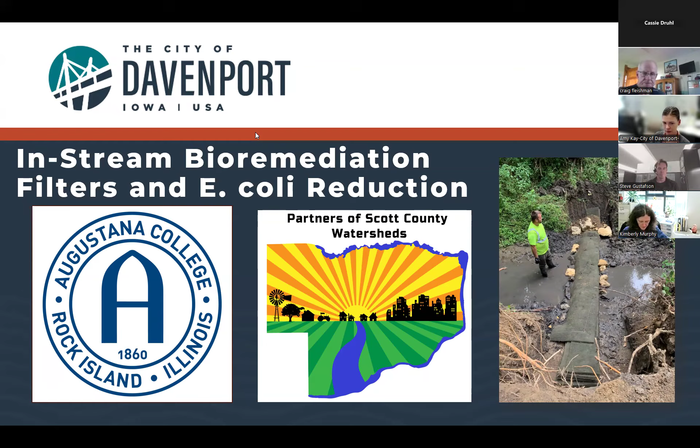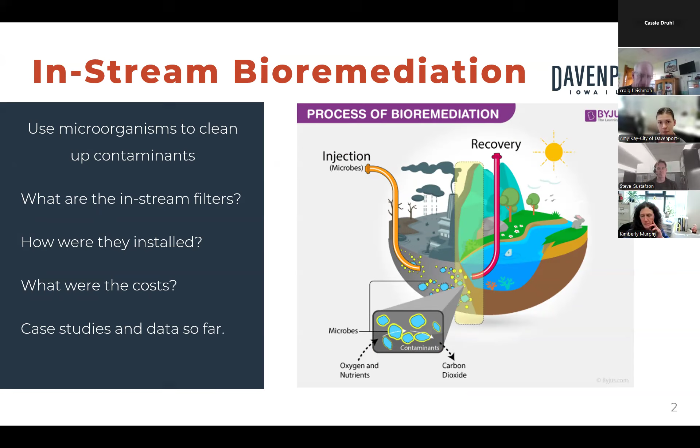So today we'll talk about what the filters are exactly, and how the install went. Just a little bit on the costs, and then case studies and data so far. And we've got a new project happening this summer that Kimberly will talk about in a little bit.

Steve, I didn't know if you wanted to provide a little background on Franklin County and how you came up or found this information.

Sure. So I was back, probably 6 or 7 years ago, really interested in looking into in situ, in-stream ways to deal with contaminants—E. coli or basically nitrate and phosphates. How I could use the stream to kind of treat itself.

So I came across this presentation on the internet by Franklin Soil and Water Conservation District, where they had taken this material that, in one of the next slides, you'll see they use floating water treatment islands made out of, and they cut it into strips and put it into streams.

They were basically looking at creating pools behind it to create habitat for small fish and invertebrates, and they noticed some decreases in E. coli. They were not a huge district and didn't have a lot of budget to monitor—they just kind of noticed it and put it in a presentation, which caught my eye.

That sparked this interest into, wow, what's going on here? I kind of hijacked the idea, I guess I would say. They came up with a lot of experimentation of how to put these things in.

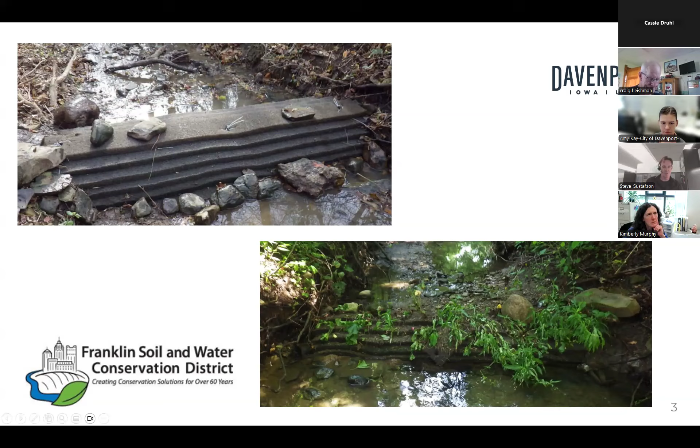You'll see this is one of their early installations. These next slides are from theirs—you can see some of their failures in that left-hand upper corner, experimenting on how to put these things in, and getting blown out during storms and such.

So we kind of learned from them. I was able to talk to the guys that did that before he retired. They probably did it in 3 or 4 spots over a few years just to see what worked, what didn't. So I was able to learn quite a bit on installation and logistics of what worked and what didn't before Amy and I even got a chance to put these in ourselves.

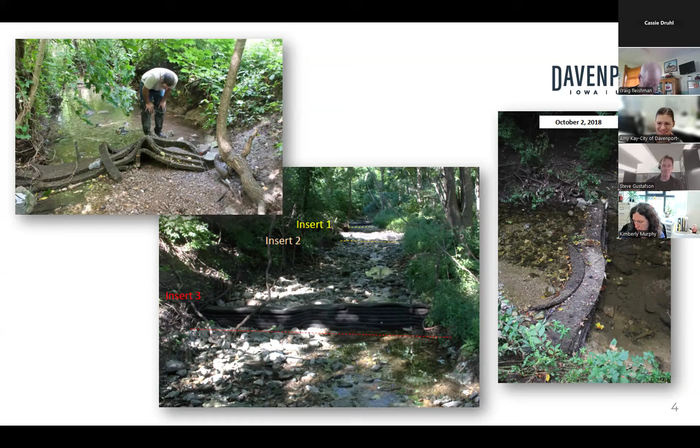Yeah, you did a lot of legwork there. I don't know what your next slide is.

On the right hand is the traditional use of this material. It essentially is a plastic mesh—I kind of equate it to steel wool, but it's plastic, and I think it's recycled plastic, like from 2-liter bottles and such. There are a bunch of different companies that sell these.

Biohaven, I think, is one of them, and we have these around different places in the Quad Cities. What they're usually treated for is you put plants in them, you put them out on a waterway, the roots go through, and they basically bring in nutrients.

But you can buy the material in strips—I can't remember how, what, 100-foot long strips? It comes in like 7.5 foot tall by 90 lineal foot, so it's a giant roll. I got an image later in the presentation, but yeah, to do with what you want, right?

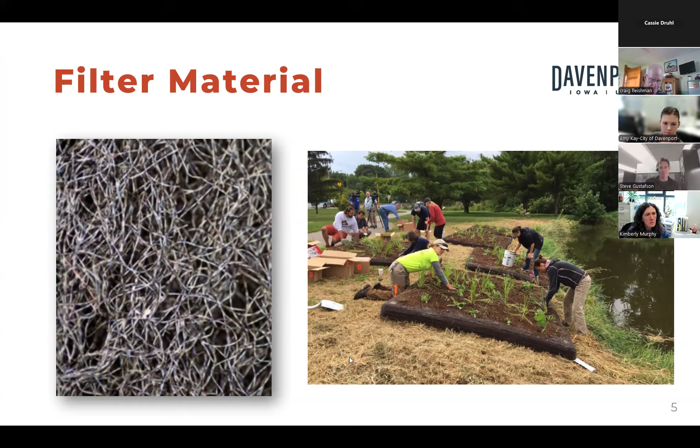It's this material, which you see on the left hand side, which is basically what we want water to float through. So we're changing what was basically a matrix for plants to propagate through and grow into, to basically change it into a place for bacteria to habitat, and water to flow through. That's what Franklin Soil and Water Conservation District kind of created. So that's basically what we're doing—we're changing the purpose of the material.

And then Amy, I guess if you want to talk about more logistics of how we actually built these, because that was a lot with your folks as well. Yeah, so the Franklin County was able to put together these images for what they learned in their install.

On the bottom left, on one of the pictures we saw, the material kind of lifted up from the flow. So they found if they were to put a blanket over top of their layers, that would hold everything in place and prevent it from lifting. In addition, they found that if you created a depression in the middle of the layers, it would keep flow from hitting the banks. Also, it was a requirement, and the second set of filters we put in from the Corps had different plan reviewers from the first project to the second, so they were just looking for some different types of things.

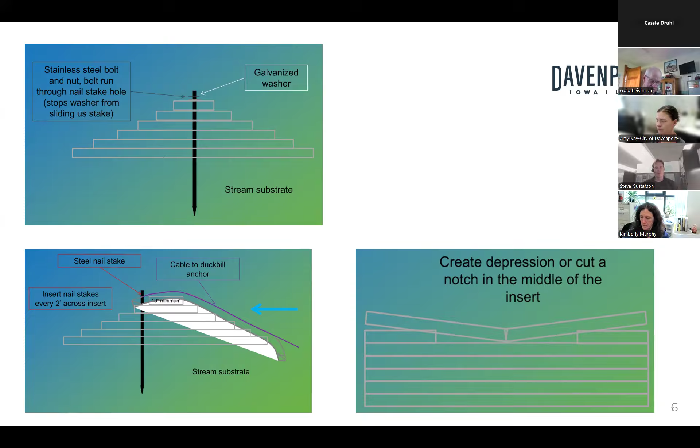But they did all of the legwork, so we had a pretty easy install. The anchoring is primarily through these duckbill anchors, where you slide them in, and when you pull it taut, they spread out like a wall anchor.

And that helped keep the stakes in place. And these are just concrete stakes that you can get from anywhere that anybody deals with concrete or setting up forms, and these will go into the ground. And then we used wires to connect everything. We've got another picture on that too.

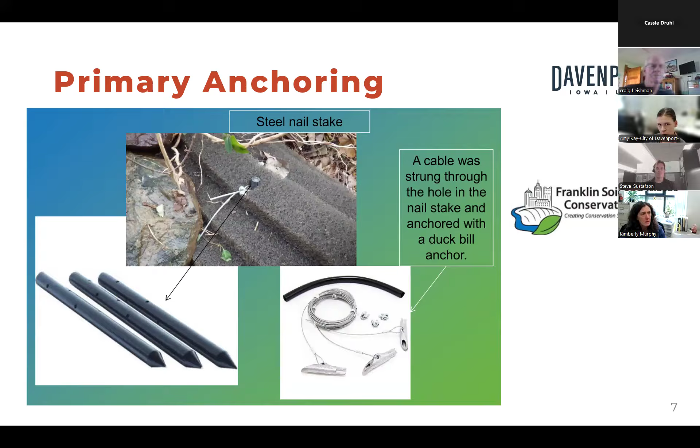At the first install, we actually had to get 4-foot anchors. We started with 2-foot, but the sub base and surrounding soils were so saturated that we couldn't really get any tooth on it, and they pulled out. So depending on what your environment is, the 2-foot stakes could be appropriate, but if it's really squishy, you may have to go to 4-foot long.

And here's an image of one of the rolls, but we still have one with our supplies. So they're 7.5 feet tall by 90 lineal feet. We got it from a place in St. Paul called Brotex, and I think they also sell like the pre-made floating islands. So we had to sign an agreement that we wouldn't be using this material to make those, just so they can protect that revenue source.

So if you are thinking about that, you might just have to go the route of purchasing them pre-made. But the first project cost about $12,000, and that was with labor and equipment, and with the initial sampling and analysis. We did use an excavator with our projects to key in the sides because we were putting them on streams that had flows a little bit higher than the Franklin County.

So they could be installed for much, much less, but having our equipment operators and equipment there definitely raised those costs. And then the tree removals - we were putting in the first project, and then the derecho happened. So we had a lot of removals that we hadn't planned for just to even access our project sites. So that probably won't be indicative of all projects either.

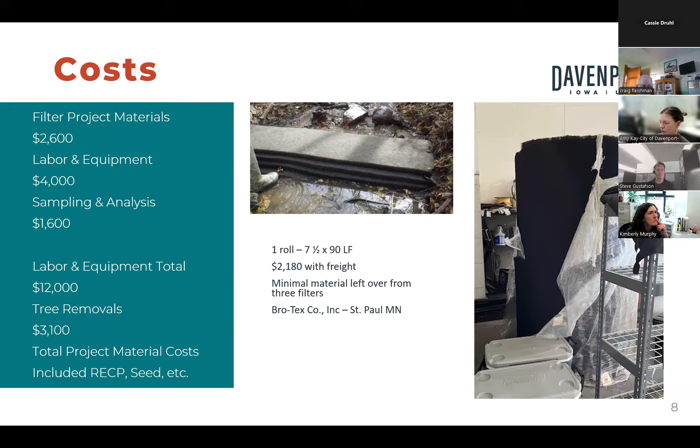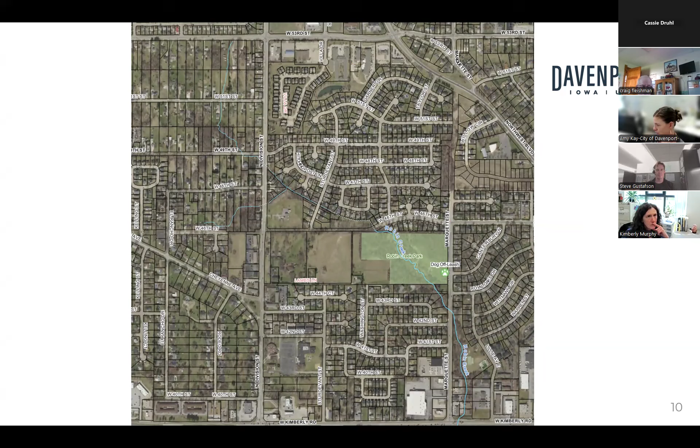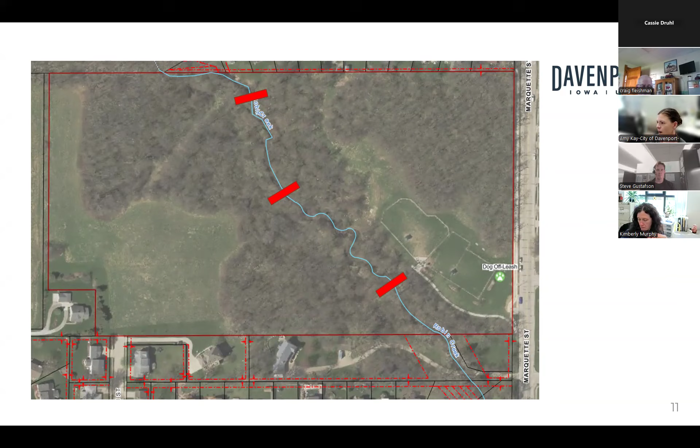We chose a spot since we didn't have much to go off of, and this was just kind of an experiment. We decided we'd go with 3 filters. We wanted to put them in on the straight sections so we didn't disrupt any of the sinuosity or have issues with additional bank erosion.

And so it's a pretty small watershed. There's about 400 acres that drain to the project site. There are 2 really big storm pipes that come in at the top - a 78 and a 66-inch. So it's a super flashy system. When it's raining, those pipes are running pretty close to full. And when it's not, there's a good amount of base flow, but it's probably around 6 to 8 inches, I think, is the normal flow.

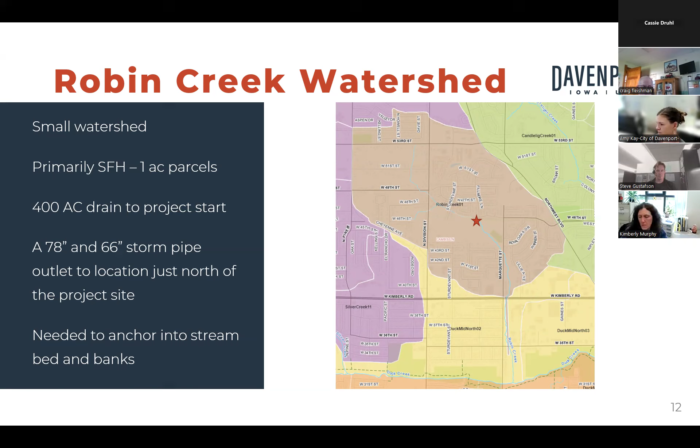And this was the site that we needed to use the 4-foot stakes on instead of 2. So early install, like I said, we brought in equipment to key in the sides. I think the Franklin County initial filters were just installed with some rocks weighting them down, but we wanted some extra assurance that they wouldn't move.

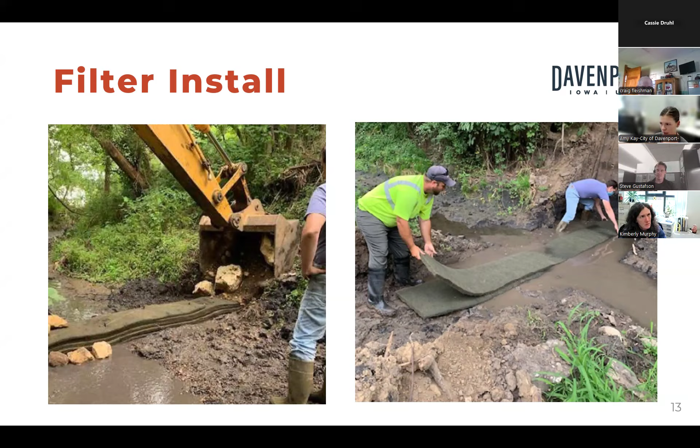Here you can see Mike and Steve in the water, getting muddy, putting the filters in. And I think that the initial information from Franklin County had the top piece that goes over the whole system kind of keyed in, but that is a challenge. And I don't think we actually keyed in across the bank on our second project because the duckbill anchors and all the wires were able to hold it in place enough.

And here's the guys working. They have a washer on top to help keep that in there. And then on this one, compared to the second project, you'll see the stakes were only up maybe less than an inch, maybe an inch. And I think the holes that the wire went through on the second project were just in a different location, and that has led to some different issues.

It was a pretty chilly day when we were working on those. It was hard to get the anchors, and everything was just really small. I remember getting all the tiny nuts attached to things was a challenge. So you've got to have some nimble fingers.

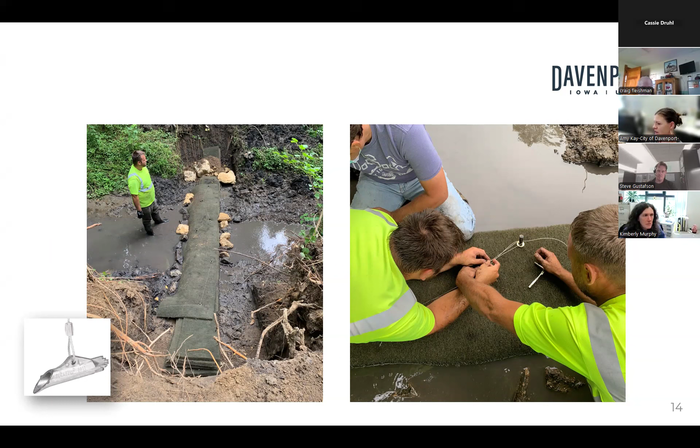We did get some signage put up at the first project site because we got some grant funding with Iowa American Water and from River Action, just to provide some education. We do get calls now and again through the city asking what they are. On this first project, you can't see them very much anymore because they've just accumulated sediment and plants and things, but when they're first installed, we did get quite a few calls.

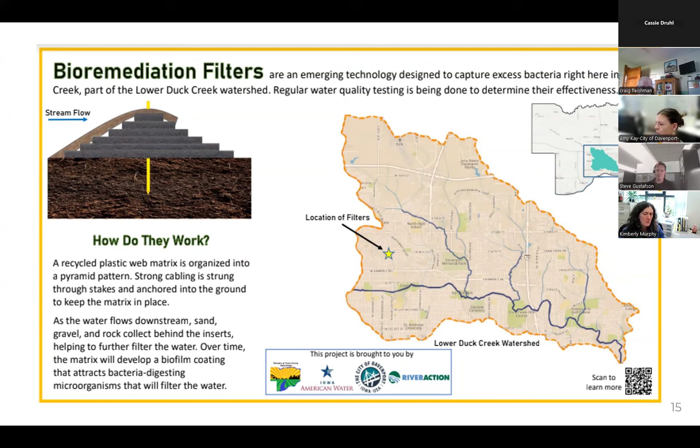We would sample upstream and downstream of the whole system. At first, we did up and downstream from each individual filter, but that was when we had some additional assistance and funding through St. Ambrose University doing some monitoring. When that dried up, we just moved to upstream of the first and downstream of the third, just to save some time and resources.

We did use the YSI monitor and then also a field kit, just the standard like Iowa Water or Snapshot chemical components. It seemed that almost everything didn't vary much from the field kit. Temperature and dissolved oxygen varied seasonally, but within normal ranges that we'd expect. Nitrate, orthophosphate, and ammonia were all non-detect or really low.

And then chloride varied, but it didn't seem to relate to anything else in the system.

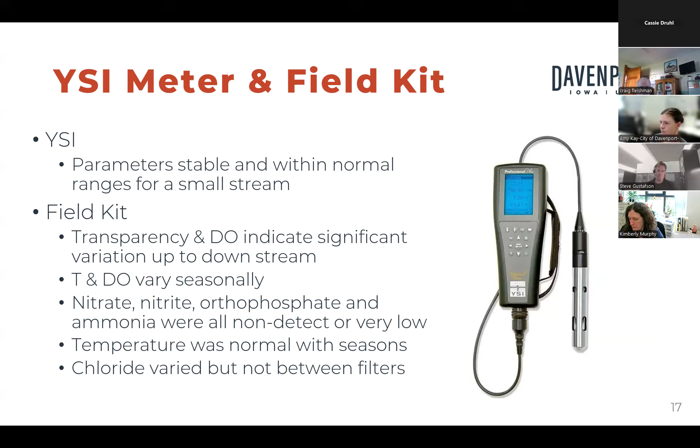This was early data just from 2020 through 2022, and it shows overall that there's close to a 30% reduction in E. coli numbers. I do have a graph later that has more recent data incorporated with it, but it's not in the same format, I apologize.

I don't know, Steve, if you wanted to talk at all about the reduction. We do have a few spots where it did increase, and that could have been due to any number of things, like animals or other bacteria sources.

Yeah, there are some areas, there are definitely some times where you did see an increase for sure. And a lot of that depends on flow, right? Definitely some of those are low flow times.

As you can see in some of those pictures, what you get behind the structure is a pool, right? A pool that backs up to the elevation of that filter. The purpose is you're not going to get all the flow of that stream through the filter. Some of it's going to go over - you want some of that to go over. You don't want things to back up, and you also want transference - you want to be able to have transference of animals back and forth.

But you're hoping that you have enough filters that you'll at least get a good chunk of that total water volume treated through that filter. It's hard to say. So there's some portion of that water that's flowing actually through that pancake of filters and getting treated in some way by some mechanism. And so when you have, like in your late July, August, September, the low flow times, there's just not enough water to even get past the filters at times, or it's very low.

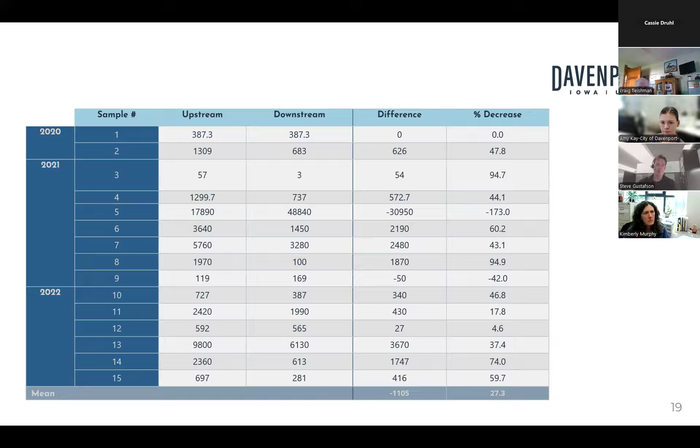But we did notice over those first 3 or 4 years, yeah, this is showing a decrease in lab calculated E. coli concentrations. So I don't know what your next slide is - Oh yeah, we didn't do too much review. Are you talking about goose?

There we go. So our second project is in the same area, but a different watershed.

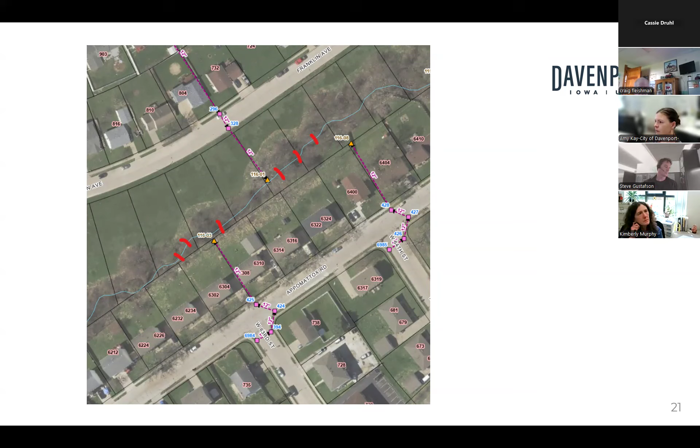We just chose the number 6 this time to see if there was going to be a marked difference, and these are more tightly spaced than Robin Creek. This site is close to 1,000 acres draining to it, so quite a bit bigger than the first site. There's a fair amount of ag, and then some light industrial, so it's a different type of flow, and we learned there's different types of sediment.

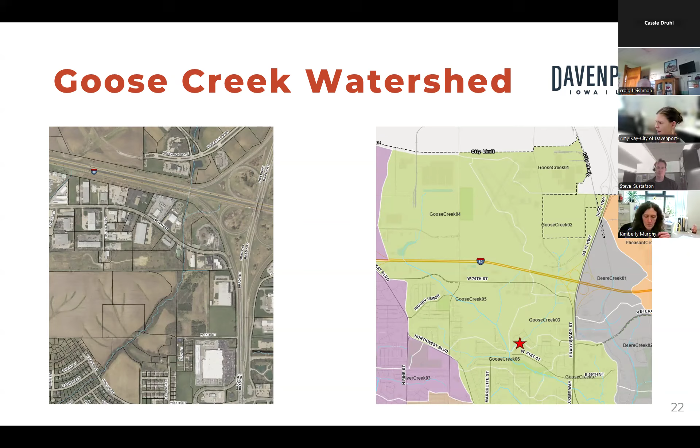And it's acting like a snag would traditionally, kind of catching things up. I wasn't out at this install too much, so I don't know if it was a completely different type of anchor or if they just made a judgment call on site. But if any other practice went in, I would leave the least amount possible of that top of the stake sticking up.

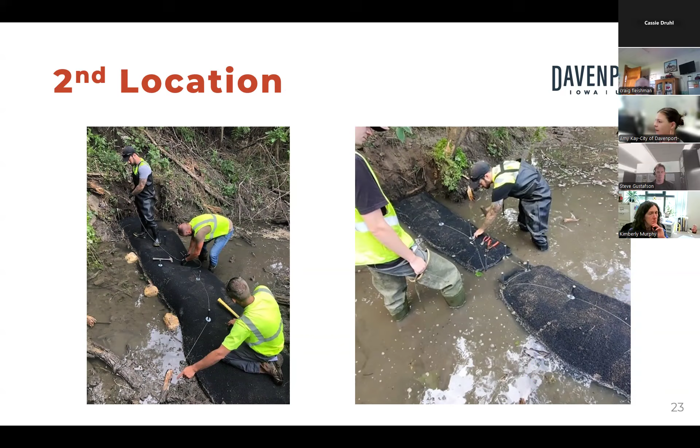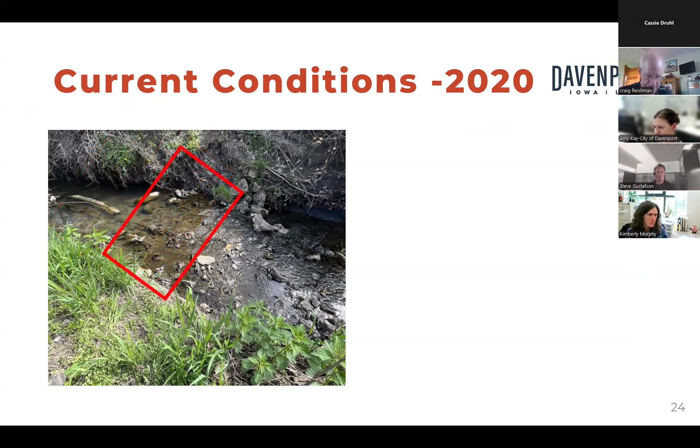So here's a current condition from the install we did in 2020. It's really hard to see, but it's kind of right in there. You can sort of see lines that are perpendicular to the stream edge, so it's built up quite a bit. This was what they looked like originally. This was 5-6 years ago, so they might not be functioning like they were initially because of all the buildup. That's again, like Steve mentioned, one of the things we're trying to find out.

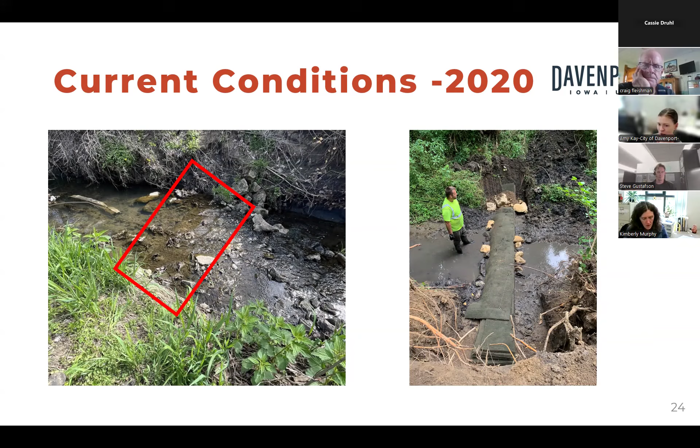And then here's the second project site, current conditions. You can see on the left there's just things getting caught up on the stakes, which isn't necessarily problematic. It depends on what it is. I think there was a shirt out there the other day—everything gets into the water somehow.

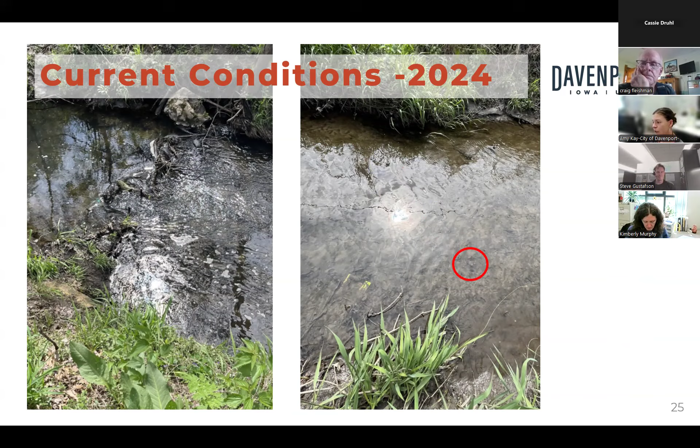And then this one, if you can sort of see that spot right there, is another one on our second project location. That's been completely silted in. There are, I believe, 2 at the far end that have completely silted in, and it was a struggle to find them, but you can sort of see the end of that stake there.

I mentioned that this site has a lot of ag draining to it as opposed to a suburban developed area, so there's a lot more sediment movement, and that wasn't really something we took into consideration when picking the site, but we certainly will in the future—just pay attention to the larger watershed area so we don't go through the efforts of installation to have them silted in within about a year and a half's time.

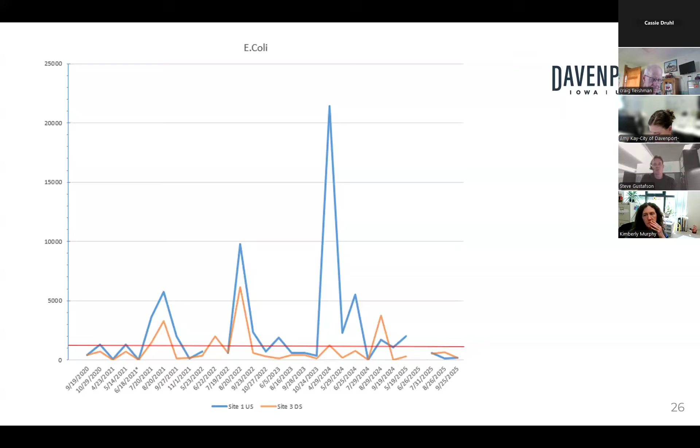What's the mechanism behind this, so we can either enhance this or understand what we're doing, we could do better. So I'm not sure what the next slide is, Amy. Kimberly, this might be a great segue for you. Yeah, perfect time for Kimberly to take over. Yeah, if you want to give a brief introduction, Kimberly, and then kind of just talk about what the current project is, different components, that would be awesome.

Sure, I'm going to stand up and shut my door real quick. It's in between class, I realized. Sure.

So the city of Davenport has worked with the Upper Mississippi River Center through Augustana for many years on a lot of different types of projects, but it started and has focused on watershed assessments primarily. They've also done some social surveys in regard to people's relationship with the stream near their house, and some microplastic assessments and other things, but this new study is just getting started, with Kimberly Murphy kind of leading the group there.

Hi folks, thanks for allowing us to talk briefly about what we've been up to so far and just some very, very preliminary findings. So I have a couple of research students, this is their main project. Well, Caleb is the main student, but when I was explaining this project to him, he really became interested in two things. One, the mechanism, like Steve mentioned, like if we're noticing a decrease in E. coli and total coliforms, why? What's going on? And then he's also really interested in the interplay between human health and the environment, and also stepping back and looking at the environment as a whole that's maybe around the filters.